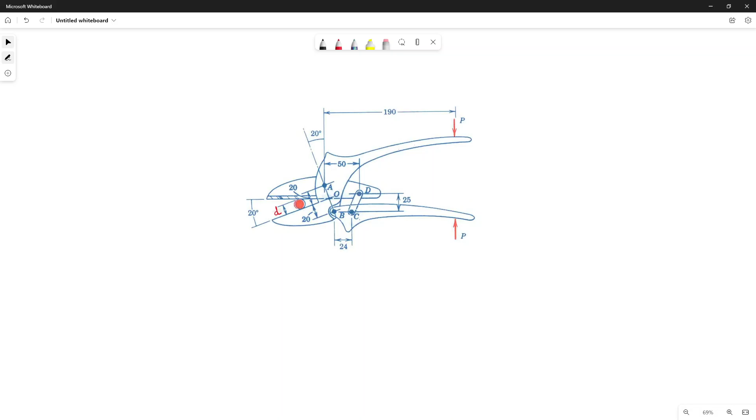Hello, hello. I will work on this problem. It's a little bit too long to be at a final exam, for example, but because I make you work on it, I will show you how to solve this.

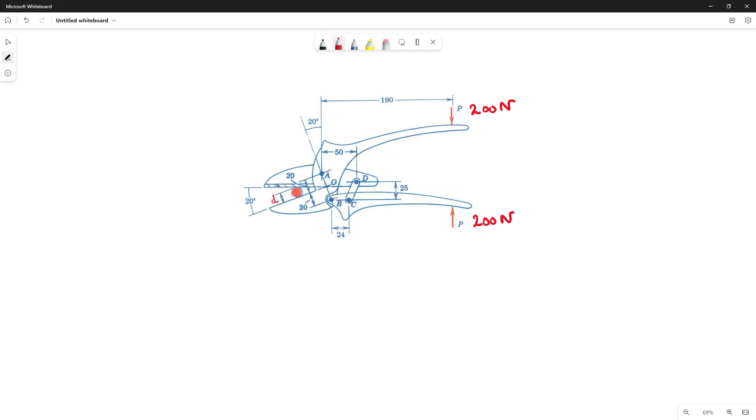So I will use P equal 200 Newton on both sides. And I will use the diameter of the wire, the little d, equal 15 millimeter. All the dimensions are millimeter, so that's what I will use.

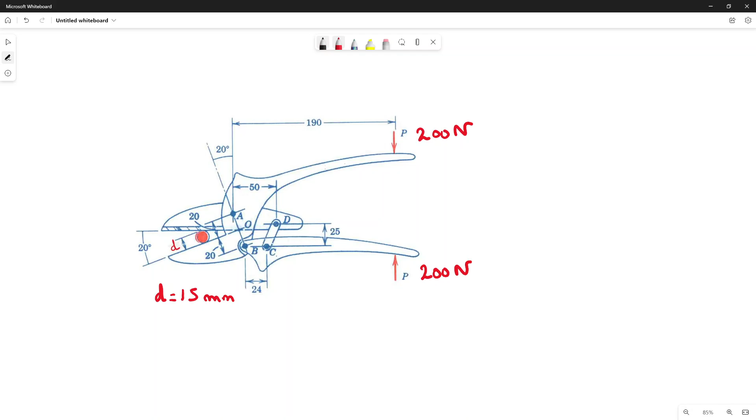Okay, so the first step will be to split this object into different parts, all the parts that are mobile together. So let me use some color. I will make a free body diagram, I will put everything on the right, of the lower handle, this one.

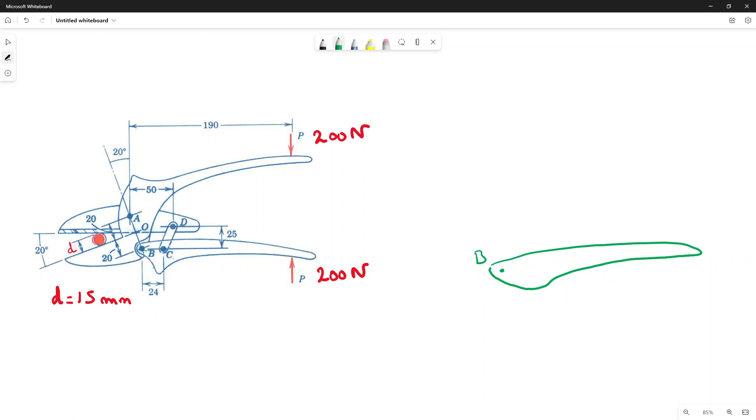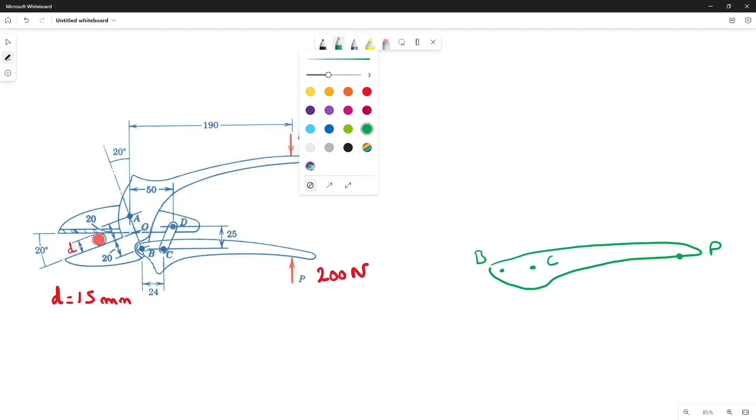I have a point B. I have the point C that is aligned like this. And I have, let's call that P. I have the little CD rod there. And this was interesting because you can see right away that it is a two forces member.

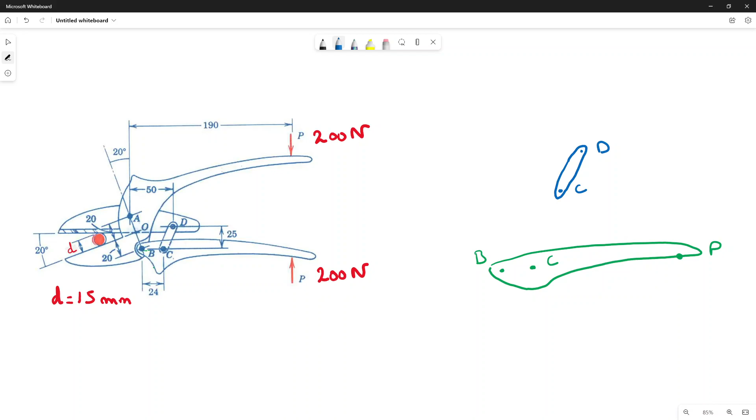And I will make the upper, this one, the upper blade. I know a little bit where I want to go, so I will not draw what I don't need. So I have the point D. I have the point A. And I have the connection with the wire there. Let's call that N.

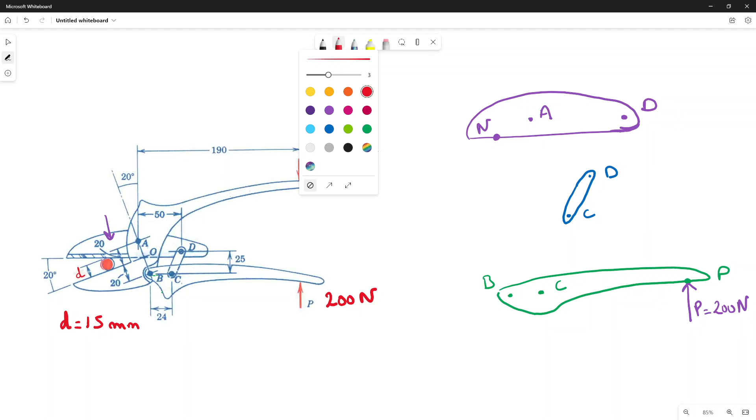Why did I do this? Because let's draw some forces now. Forces that we know. We need to have at least one of those parts who have a force that we know, and what we know is P equal 200 Newton, that is perfectly vertical. And the force that we don't know, we have this force N1, and that's the force that we try to find.

At A, we have a pin connection, so we have two forces. And D and C, that's where it's interesting. So if we look at the bottom one, the green part, at B we have two forces. If we do the moment about B, we can see that the force P will make a moment in that direction, so the force C needs to do a moment in that direction, meaning we need to have the force FCD going down, this one will go up, FCD going down, always the same, and going up FCD this one.

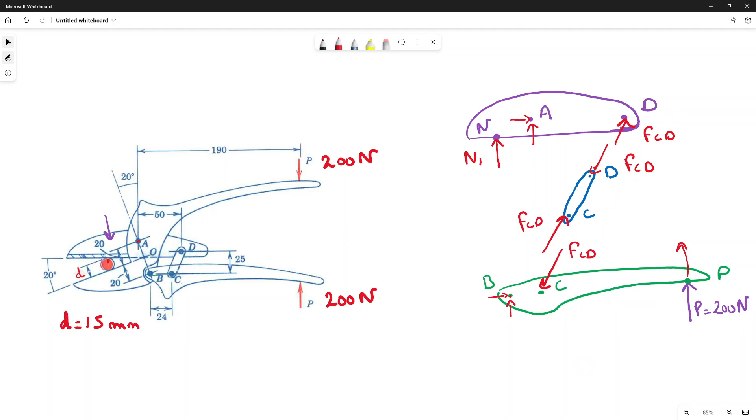Okay, so we have all our forces. The only force that we know is the force, I should make it blue, let me make it blue. Oops, this one should be blue. The only force that we know is the force P, 200 Newton, and all the other forces we don't know.

But if we begin by doing on the green part the sum of the moment about B equals 0, we can solve for FCD. And if we do number 2, we use the purple part and we do sum of the moment about A equals 0, we know FCD, we can solve for N1.

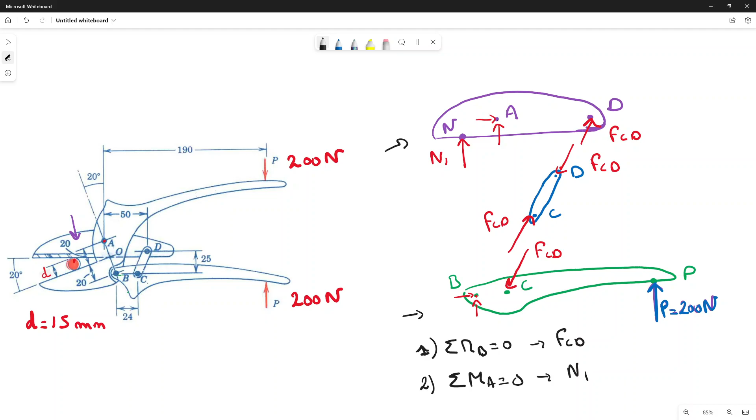Okay, the only thing that we need is some dimensions and angle. So let's look at this there. We need to have the distance BC. So we have the distance BC already there, so we have the 24, this one. But we also need the distance from B to P, this one.

How can we find this one? We can use, okay, we can use the 50. We can use the 190. And we can remove the 24. That makes sense? So, and we need to find this distance there.

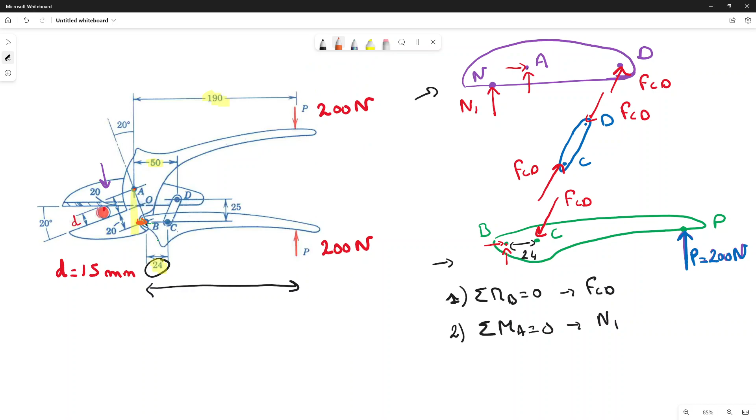So one important distance that we need to find right now, I will make it in orange, is this one. So let's find this distance. Yes, so I will draw a little triangle. So we have A, O, and B.

Okay, we can make a triangle like this with a right angle. We have 20 and 20, so this distance total A to B is 40, and this angle there is the same than the 20 there, so it's 20 degrees.

So the little distance that I will call this little distance A, let me see if I call this the same way. Yes, I call this little distance A. We can write that sine of 20 degrees is equal to the opposite A divided by 40. So we have A equal 40 sine 20 degrees. That gives us A equal 13.7 millimeter.

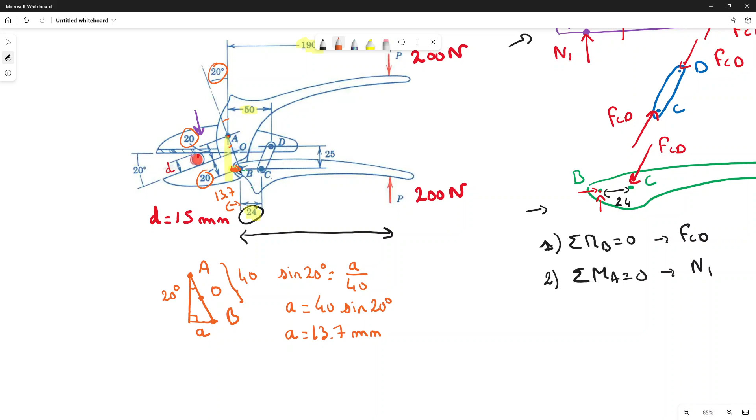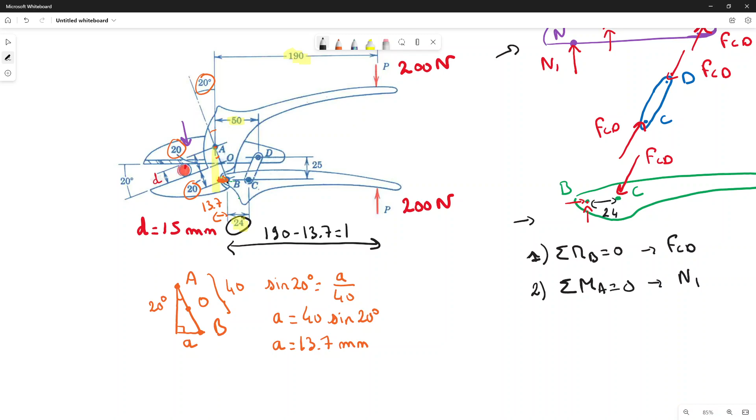Okay, so we know that this one equals 13.7. So we can find this distance that will be 190 minus 13.7, that is 176.3 millimeter. So now we have this distance on this free body diagram. Let me draw it.

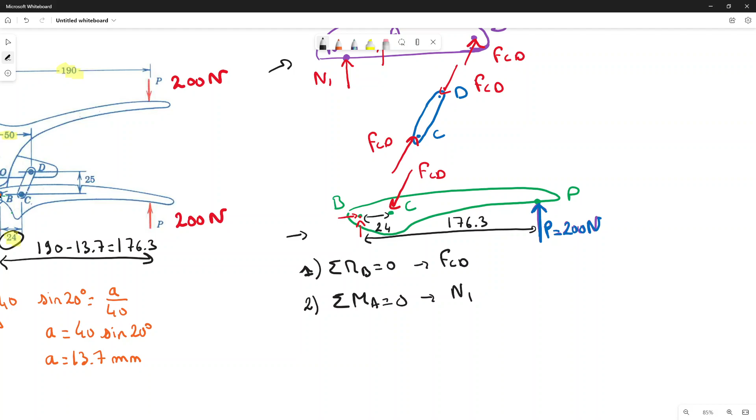176.3 millimeter, so the 24, the 176.3. Now what we are missing, the last thing we are missing is this angle there with x. Because if we look, A and B are aligned, so we just need that angle there.

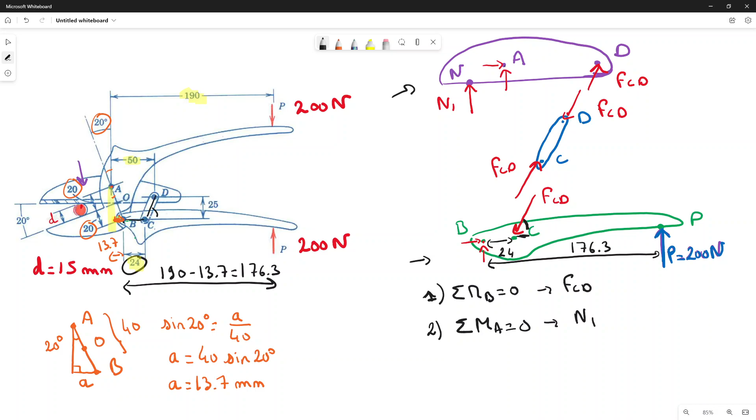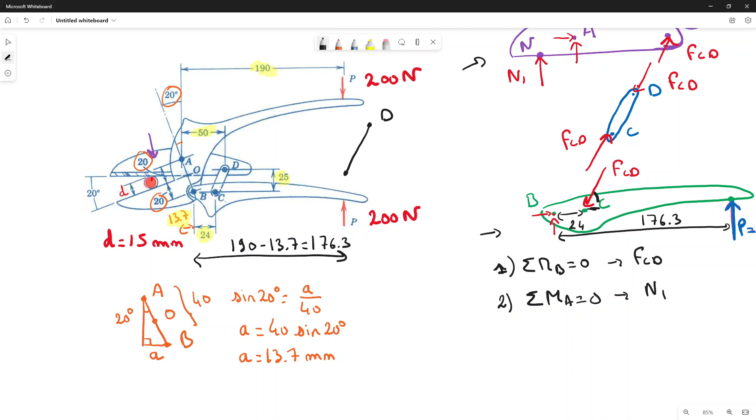So to find that angle, not super difficult because we already have the 50. We have now the 13.7, we have the 24, and we have this 25. So what we get is like, we have D, we have C, this distance 25, and this little distance there that I call B. What is this distance B? Smaller than that.

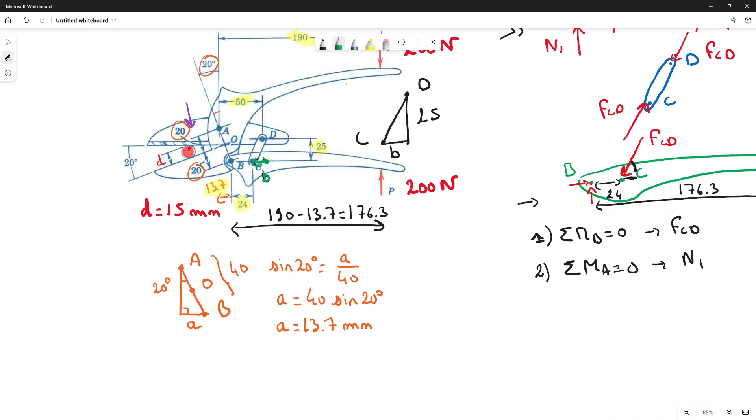We'll use some green. Everything about this distance B will be in green. We have B, that is equal to 50 minus 13.7 and minus 24. So we can write that B equals 12.3 millimeter.

This is this distance, and why do we need B? We need B to find this angle alpha. So now we have B equal to 12.3 millimeter. So we have the angle alpha, that is tangent alpha equal opposite 25 divided by 12.3. So we got alpha equal to 63.8 degrees.

So now that we have this angle, we can come back on this free body diagram using 63.8 degrees there. We are ready to work on our equation number 1. Let's work on equation number 1. I will make it next to this free body diagram.

Equation number 1, sum of the moment about B. So we have FCD going in the negative direction. We want to take only the vertical component because the horizontal component is going through B, so it doesn't create any moment. So we need just the vertical component, so it's the opposite of the angle, so it's sine 63.8 degrees times the distance 24. Don't forget the distance, times this distance. And P will be plus P times the total distance 176.3 that we found before, equals 0.

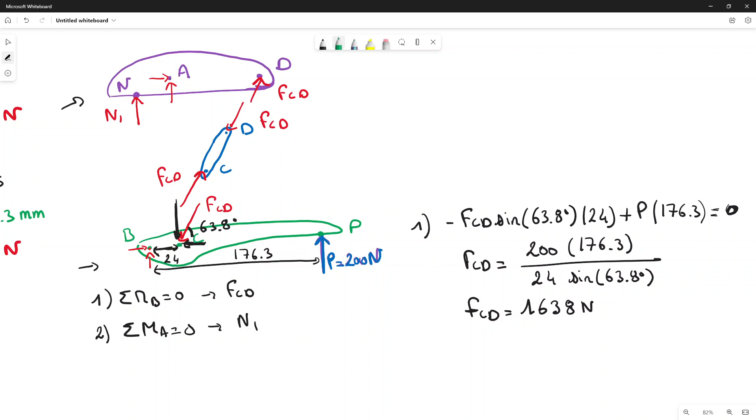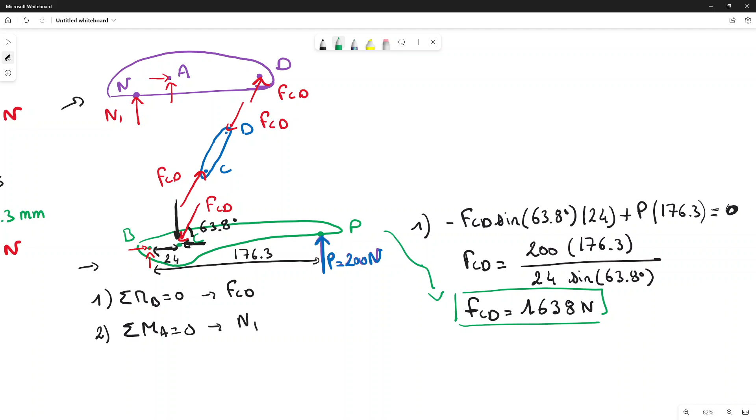First step done. With the green free-body diagram, we get this FCD. We did half of the work. So we know FCD, we know FCD. We can now change this FCD on the purple free-body diagram, blue, because we know that value, that's the same.

So let me draw the FCD there, and we also know the angle alpha, that is 63.8 degrees. Try to get some space. In blue, FCD. Okay, let's look at this part there in purple a little bit more.

So we are looking at this one. Something we have to notice is like the point A is not aligned with the point D, vertically or horizontally. So let me change this one a little bit to make it a little bit higher. This point A, I will even exaggerate a little bit so we don't make the mistake. At the point A, we have our two unknowns, like this.

So when we will do the moment about A, we need some distance. We need this horizontal distance, we have it, so we have this distance 50. But we also need this vertical distance, so this one. We will need to work on that.

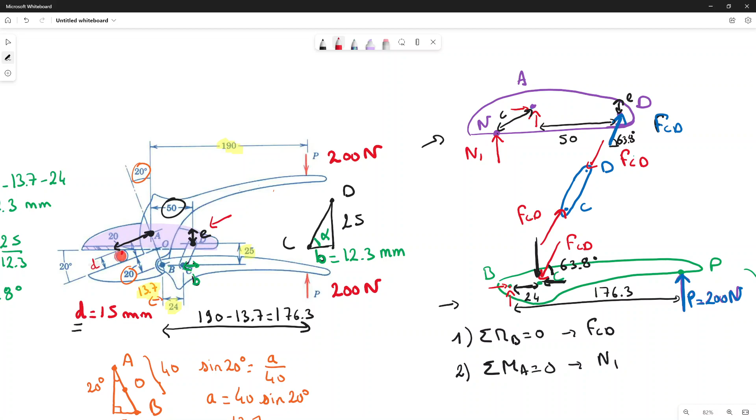We need to find this distance, this distance there, so I am on that one. So we have 25. We know the 25, we can find this total distance there. We already have it, we already have the triangle. So that's this one, and yeah, that will be this.

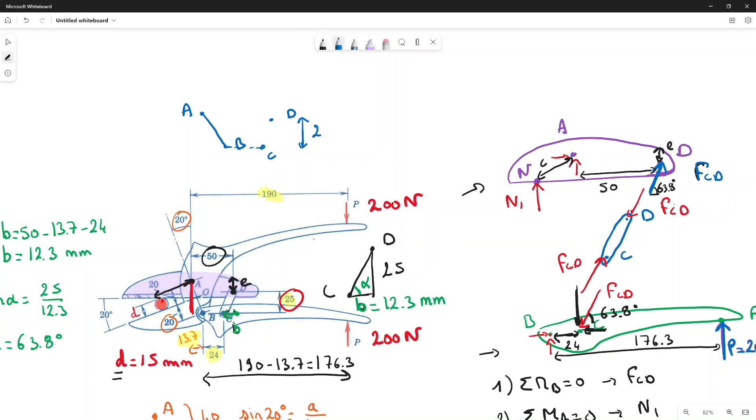So let's do, I will work in blue to get this distance E. We have the point A, we have the point B, we have the point C, and we have the point D, like this. We know that this distance is 25. And we will need to find this distance. To find this distance, we use the same triangle.

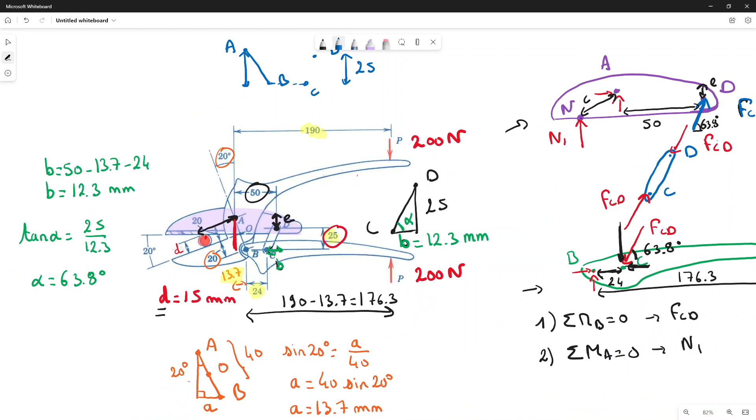So 40 and 20 degrees. But that time, we will use cosine 20 degrees. It's equal to the value that we are looking for, x, divided by 40. So x equals 40 times cosine 20 degrees.

What is this distance? Let me check. Oh, this is 37. So x equals 37.6 millimeter.

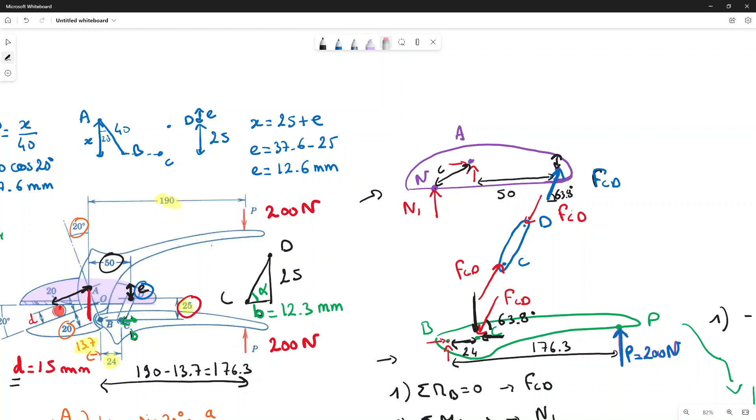And now, to find E there, I'm looking for this distance E. So we will have x that is equal to 25 plus E. So we can find E that is equal to 37.6 minus 25. So we got a dimension E of 12.6 millimeter. So we can add this distance on this free body diagram, that's the distance E. Let me remove E and write 12.6 millimeter, that's at the point D. And now we need this distance C.

Here on the right, we need this distance C. So to find this distance C, let's go back on this one. We are looking to find this distance C, and this distance C will depend on the diameter. That's the only time it will depend on the diameter. So we have the diameter D, and we have the 20 degrees inside this one. So let me draw that. We have like this, and this. Be careful, the square angle is there.

We have this distance D, in our case that is 15, and we have a 20 degree angle, and the distance we are looking for is this C. So we have tangent 20 degrees equal to 15 divided by C. We can write that C equals 15 divided by tangent 20 degrees.

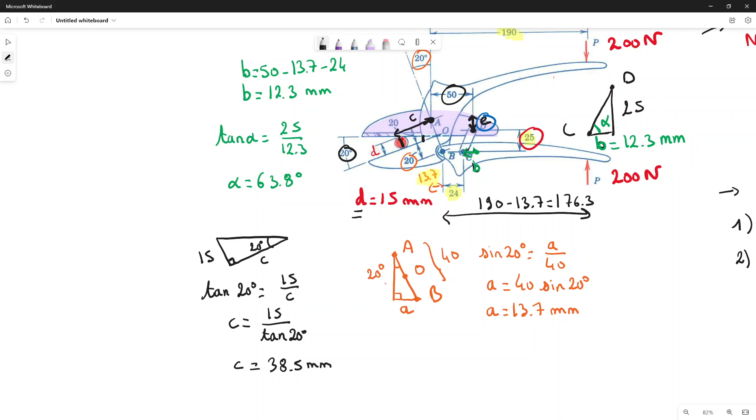So C, in our case, will be 38.5. We can come back on our free body diagram and write that C equals 38.5.

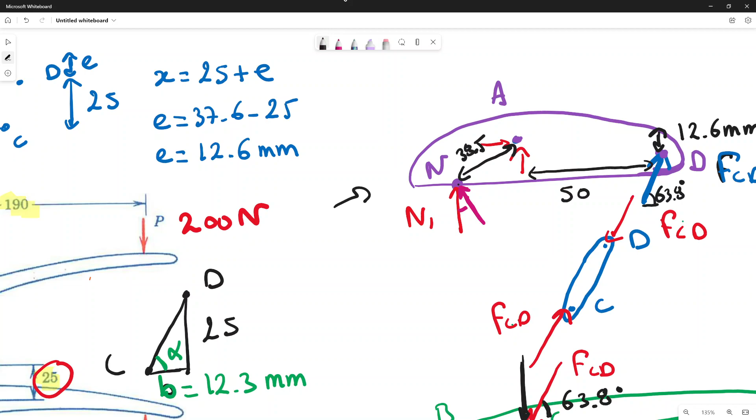One last thing is, we will not use N1, but we can use the component that is perpendicular to 38.5 instead. And we know that this angle there will also be 20 degrees, because that's the same angle between this one and the vertical, that's the same angle as this one, of the 90, etc.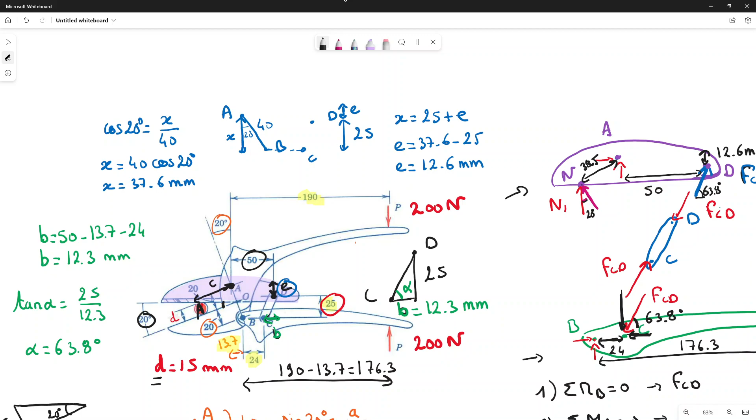So I think we got all our dimensions. Let's do this. Yes, we have all our dimensions. So number 2, I will do the moment. This one was the sum of the moments about B equals 0. And step number 2 is the sum of the moments about A equals 0. So what do we have?

We have the FCD sine 63.8, that is the vertical complement, times 50, this distance, that creates rotation in the positive direction. After that, we have plus FCD cosine 63.8 degrees, so this little horizontal one that also creates a positive rotation, but we need to multiply by 12.6 millimeter.

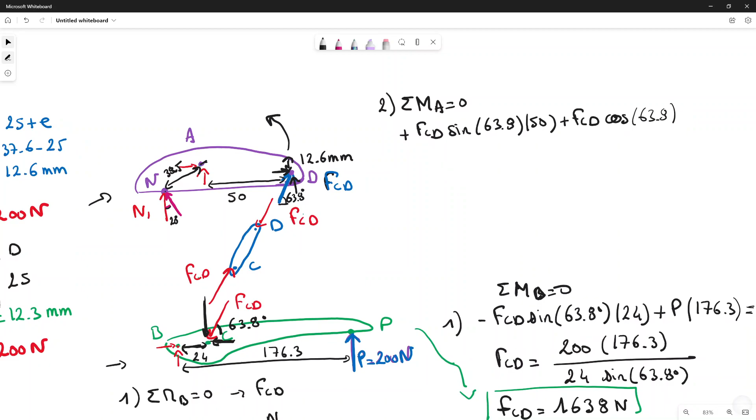And for N1, N1 will create a negative rotation, so that will be minus N1. So we want this complement, so cosine 20 degrees, times the distance 38.5. And it's equal to 0. So we can write that N1 will be equal to, in the bottom we divide by cosine 20 degrees and times 38.5. So I should put at least parentheses there.

And on the top, we will have the distance 50 sine 63.8, and plus 12.6 times cosine 63.8 degrees too. And that will give us N1 that is equal to 2,285 Newton. That's the answer we get with the free body diagram number 2.

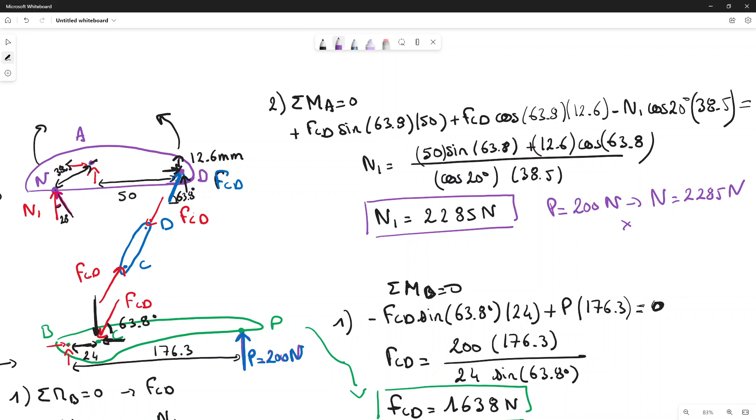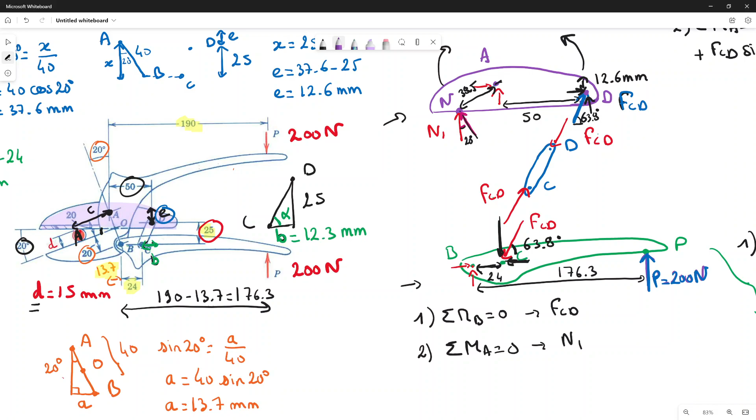I should almost say number 3 because we use also the little blue parts, the two forces member. And the conclusion is, from a P force of 200 Newton, we apply a normal force on the wire of 2,285 Newton. So we multiply by more than 10, 11, multiplied by 11. The force with this special scissor there, just with the location of the different pin connections and the number of parts and the way it's made, we multiply the forces by 10.

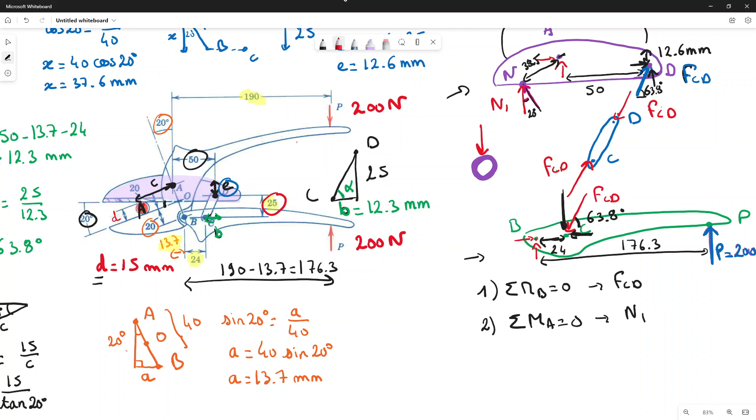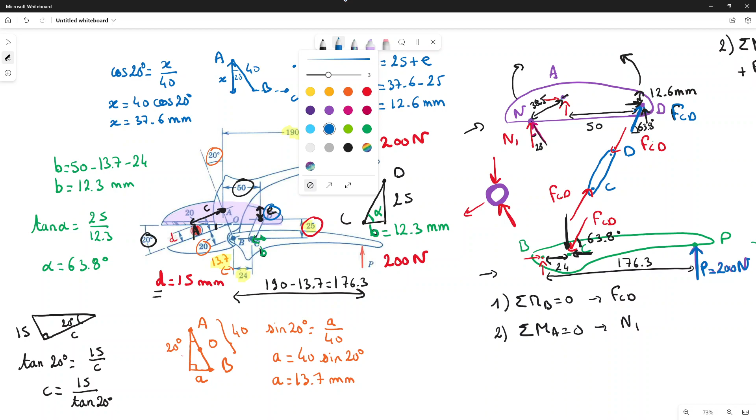So let me make a little summary, and I draw one thing that I want to tell you on the wire. So I have the wire like this, okay, and I draw two normal forces, perpendicular and perpendicular. But if we leave it like this way, it will slip to the right. So we will need to add some friction forces that are always perpendicular to the normal force this way to balance, to keep it static. Yeah, that's what we need to add, the friction forces there. We will work on that later.

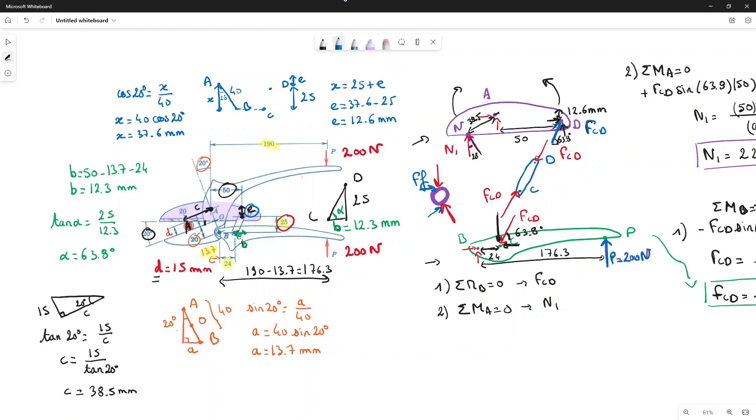So little summary, what we did, little overview. We went from one big complex structure, machine, to a few free body diagrams, but well chosen, with at least one with a known value, a given value, never more than 3 unknowns.

And if you have a pin connection, you take the moment at the pin connection. Always worth it. So you ended up being just one unknown, because there's 2 unknowns at the pin connections and 1 unknown left, and you solve with an equation of moment. Look for two forces members, because you know the directions of the two forces member. So we found the CD rod with two forces member. And after that, you just go one step at a time.

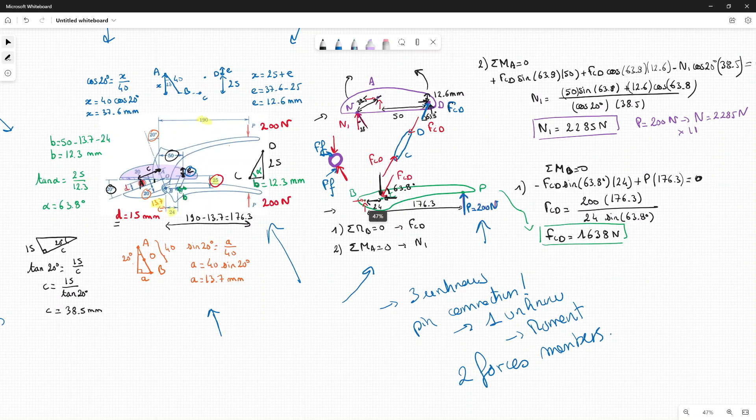And what took some time is to find all those little dimensions for this problem. That was a little bit challenging, that was the challenge there. And we ended up solving two equations of moment. So that is for this problem. You see, it was not that crazy, but we need to take the time and very well analyze the different dimensions. Let me clean that before I turn off the video.